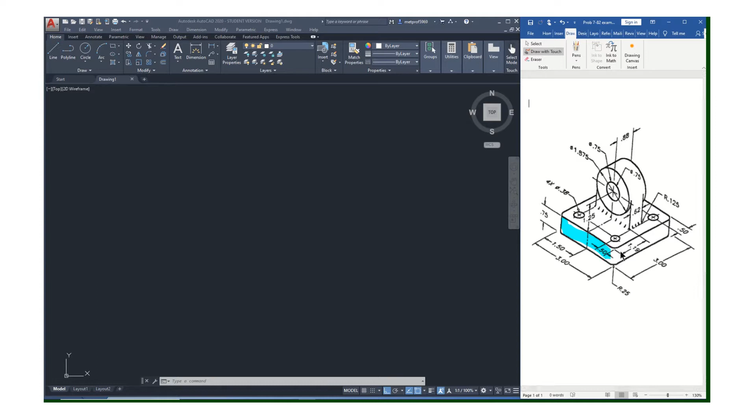Now, it's an interesting part. It does have a lot of geometry to deal with. So let's kind of look at what we're going to see when we do look at the front view. You're going to see this face here. Now, something interesting happened: notice these corners are rounded off. They're filleted. So what you're going to see though from that view is you'll just see a straight edge. You can't tell that it's filleted from this point of view.

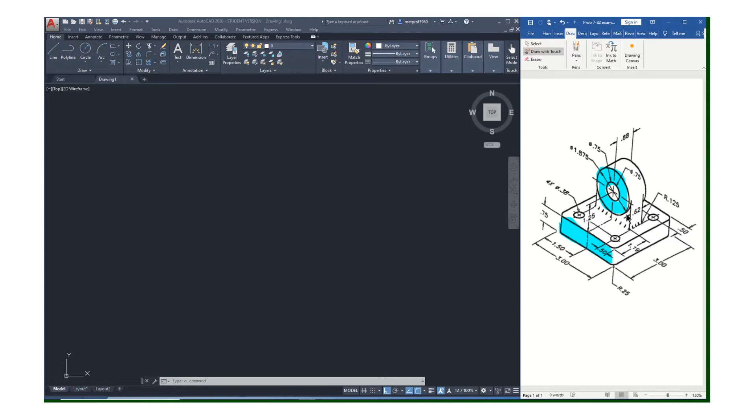That's something you have to kind of get used to. This isn't like a 3D sketch. It's a flat sketch. So when we look at this, we'll see that surface. We're also going to see this round with the hole in it. And we're going to see this part here that connects. Now notice there's a little gap in there, but we won't see that gap from this front view.

And you see those little lines in there? Those lines are trying to show you on this sketch. Now this is not an orthographic. This is kind of a pictorial. They're telling you that that's filleted. So if I'm looking this way, I can see those fillets. So we're not going to have marks like that because we're going to have multiple views.

Now also notice you see the marks there, and that is going to affect the way that we draw this front view because you will see that that's rounded off right there when you look at it. So that's what you'd see in terms of objects. Now we're going to have some hidden lines to deal with because of these holes in the part, but that's a good starting point for us for the front view.

So first of all, let's set up our layers. For my 0 layer, it'll be white, continuous. I am going to use a slightly thicker line. That 0.3 seems to work good. Now remember, that's not going to show up if you don't turn the line weight on. So type in line weight and make sure you do display the line weight.

And we're going to make a center line layer. I've been using blue for that. Oops, okay. It's not going to be a continuous line. I need to load those center lines. Center, say okay, and then make sure you choose it and say okay, and that's good. That's usually why I don't change this until the end, because it'll keep making everything 0.3. So that's the default size, don't forget. If you're going to change that, a good idea is do them all and then come in and change the line weight of just that one.

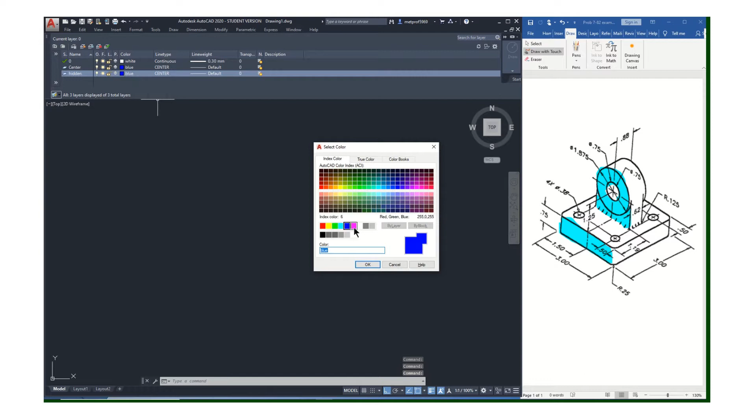And we're going to have hidden lines. And I've been using magenta, I'll just stick with that. And we have to load our hidden lines. Say okay, choose hidden, say okay. So that layer called hidden will be magenta, it'll be a hidden line, and it's a default line weight.

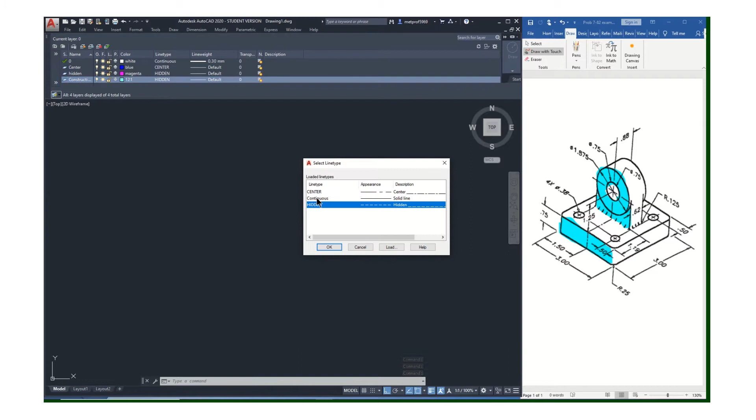And I want to make a construction layer. And I've been using this really light, I think it's 121 is the number, really light blue. Make sure, because again, it'll take the last line type and load it into that. Make sure you put that on continuous, default line weight. And then I always make a dimension layer. And I'll just use red. Continuous line. Okay, I think we're good on our layers.

So again, with that being our front view, let's start with our construction layer. Make sure your ortho is on and your object snap is on. My grid and my snap mode are turned off. Remember, snap mode and object snap are not the same thing. So I'm going to just draw a line here. I'm going to make that like 10 inches long. And same with that one. All right, so this part, if you look at the overall width, is 3 inches wide. So we'll do an offset of 3.

And then what about the height of it? We'll have to do a little bit of math here. What's the overall height of this? This is 0.75. You have a dimension here. Let's see. All right, so I'd get my calculator out, but that's 0.75 high. Here's this dimension: 1.25 will go from that surface up to the center. Now I got to figure out from there to there.

And let's see, if we look, you'll see you have this dimension here. That's the diameter, so that's from edge to edge, which would be the same as bottom to top, and I need half of that. So take that number, divide it by 2, so 1.875 divided by 2, because that's the radius, center to the top, plus 1.25 plus 0.75. So that's easy, because 0.75 plus 1.25 is 2. If you take 1.875 divided by 2, it's 0.9375 plus 2, so it's 2.9375. It's almost 3, but not quite, right?

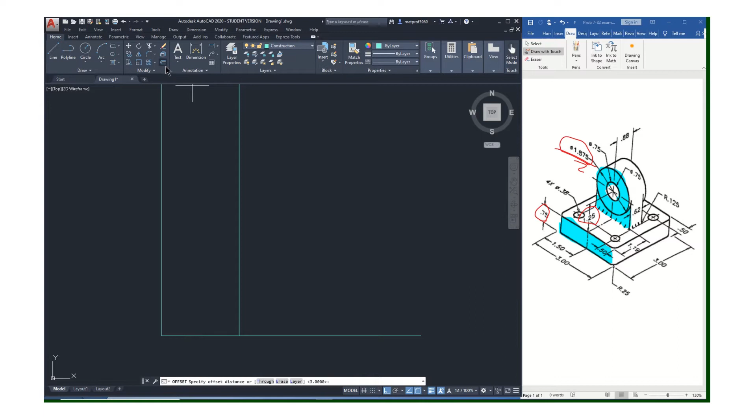So we'll do offset 2.9375, offset up. That'll be the space for our front view. Now, this is kind of a small part, so don't leave too much space between the views. It's going to look kind of ridiculous. So let's just leave 2 inches. Let me do an offset of 2. See how that looks. Yeah, that's okay. I could probably go smaller, but that's all right.

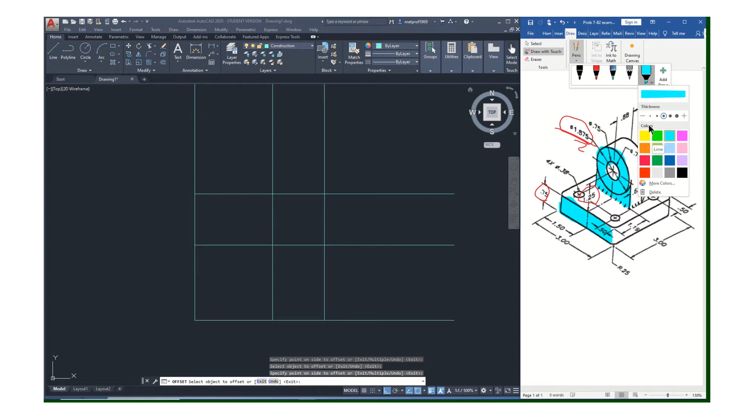And then let's look at the side view. What are we going to see on the side view here? Oh, what do we like? How about this pink color? So when you're looking at the side, you're going to see this part here. Now notice there's a little bit of a step here, which will take care of that. See this? Now this is circular, so you're not going to be able to tell it's round, but you're just going to see all the way up to the top of the part. So from this right side view, I would see what's in the pink right there in terms of object lines. Now again, we're going to have to deal with some hidden lines along the way.

But okay, so back to the width, it's 3 inches. So it's kind of almost a square, quite honestly. You could kind of carve this thing out of a cube. So let's do an offset of 3. Oops, it's in the middle of something else. 3. One more time. Forgot to hit enter. Okay. And then offset of 3. And that'll be a front view, right side view, top view. Let's go ahead and work on this front view. We'll get started with that.

So again, we know we're going to have that little rectangle there. It's 0.75 high, so we can do an offset of 0.75. That'll be that little step there. And now I'm going to have this section that I'm seeing right here. And what is the width of that? Well, what we do know is this diameter here is 1.875. So again, the diameter means anywhere from top to bottom, side to side, edge to edge. From side to side is going to be 1.875. So probably a good idea here is let's just put a center line on this thing.

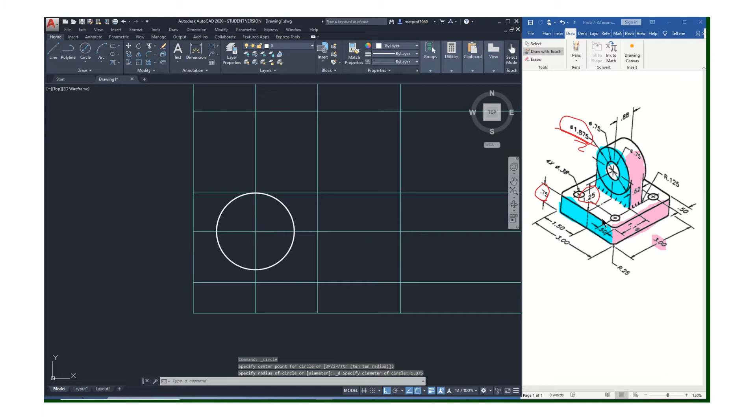So let's switch to our 0 layer. I'm going to draw that circular feature there, center, diameter. Again, it's 1.875. That'll be that. This base is just a matter of connecting the dots, basically. Let's see the width of this. It's the width of here, so we just have to come down from there.

Your object snap is on, so it's going to click onto that now. Again, you've seen this where it does this weird thing. Probably the easiest way is just go past that line, and it'll be vertical, it'll be attached to the circle, and then you just come back in and trim that. Right, just save yourself a little bit of trouble. So basically, again, now you see what's in the blue. Now remember we talked about that these corners are filleted, but you cannot tell from this view.

You're not going to be able to tell about those fillets till I get to the top. Speaking of fillets, look at these little corners. See the callout for a radius of 1/8 of an inch. So on the sides, it kind of flares out. When you make a casting or a plastic injection molding, you typically try to avoid square corners because it's difficult to get them out of the mold. Also, it actually makes a stronger part if you put those fillets.

So we need a fillet with a radius of 0.125. So let's just go to our fillet command. Remember, you have to hit R, enter, type in the radius, 0.125, hit enter, and then click on your 2 lines, and that'll put the fillet. Now you see something happened here, and that is it also wiped out that line. That's a setting which we can come in and change. It's easier just to go ahead and redraw it.

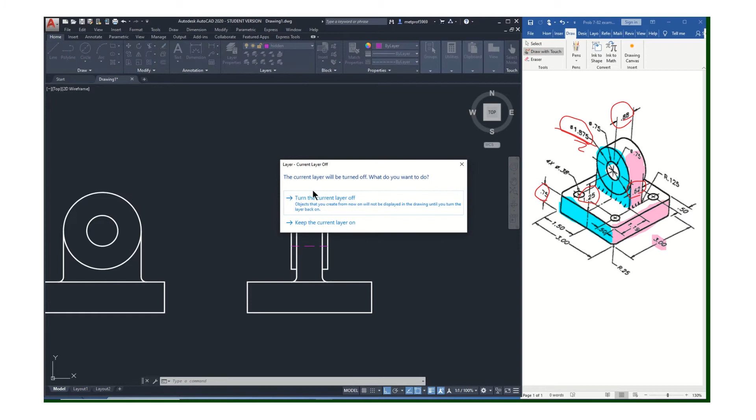Now I do need a center line on there, and that's easy enough to do. Let's turn my construction layer back on. I am going to, believe it or not, turn off some of these lines. It's getting a little crazy here. And I'm going to use these for that top view, so I'm going to leave those on there. So I need a center line that goes along there.

Now remember, the center lines extend beyond the edge of the part, so let's just do an offset. This probably isn't going to need to be very wide. I'm going to do a 0.5 offset. It's maybe a little long, but let's just go with that. Switch to my center line layer and draw my center line. Construction layer off. The blue's a little hard to see, but there's my center line.

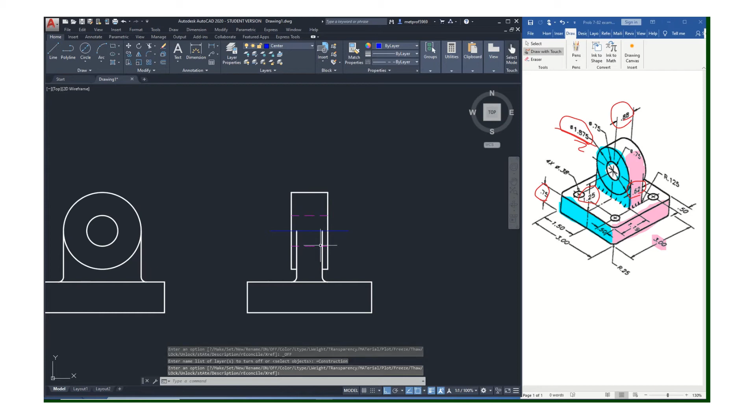Now I still don't have these holes in here. I'll show you why. We'll generate those in a minute. So I'm going to turn this crazy construction layer back on. So front view is done, right side view is done. One thing I didn't do is a miter line. Let's go back.

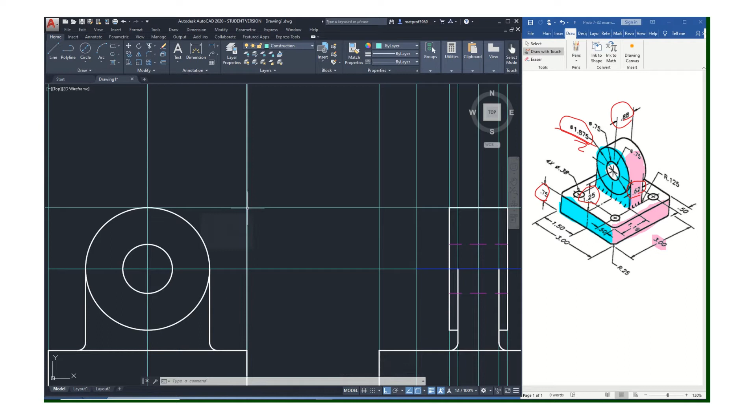So the miter line starts here. If you look at your front view, the imaginary, or maybe it's real, depending on the geometry, upper right-hand corner of the front view, we're going to project a line that's up at a 45-degree angle. Now, because we left even spacing between our views, all I've got to do is click between there, right? So I check that. It better say 45. Yeah, that's my miter. Okay. So top view is going to be here.

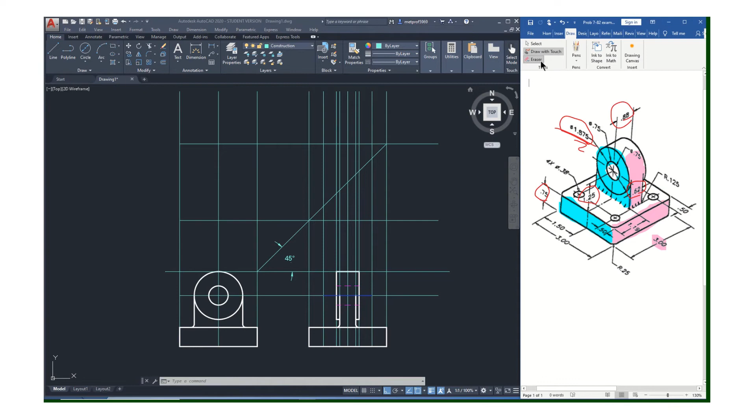Now, what is the top view going to look like? Let's get rid of some of my scribbles. On the top view, I'm going to see this, which is why some people may say this is the front view. I'd be okay with that as long as you were careful with your orientation. I'm going to see that. I'm also going to see the top of this, but I have that same situation where this part is circular, but I'm looking down on this part. So I'm looking down on a cylinder. I can't tell that it's round. You can with your eyeball, but not on an orthographic projection.

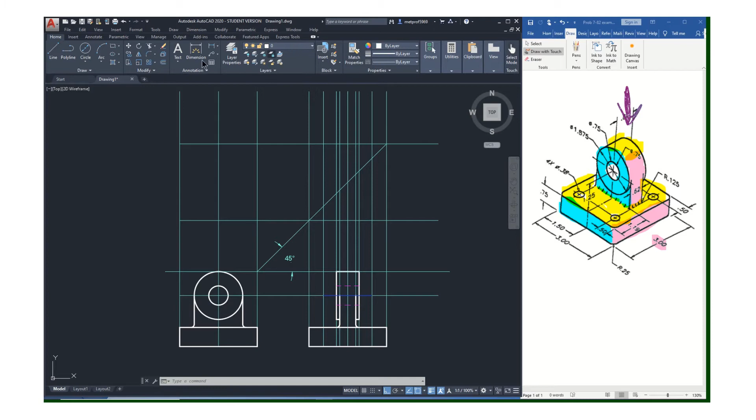So I know the bottom is 3 by 3. Sometimes it's nice to go ahead and put some of these lines on here so that you can keep track of where you are. Okay, I hope I don't forget about this: these corners are all filleted, but I'm going to wait till I have the other stuff done before I get too serious about that. What else do we want to put on there? Let's put this structure that goes on top of here. So let's go back to our construction layer.

Now I know that I'm going to have something to line up to that edge and something to line up to that edge. And now let's use these miter lines. So I've got this line, which is the outside edge. That would be like this face here. There's a line there. So I'm going to project that up and over. So let's see, find that one. It's right there. Again, I'm going to go past the part. Let's go to the other side, and that goes up to there. So let me just draw a line over there.

I try not to do too much stuff at once here. And I'm going to go ahead and darken that in. We'll take a look at that. Okay, so again, looking down on this, now it may be a little hard to understand for now, but when I'm looking down on this cylinder, it just looks like a rectangle. So that's the basic outline. But also notice, okay, I'm going to go ahead, get rid of a few of these lines that I don't need. It's getting very, very cluttered. I don't even remember what that line there was. That's right, we'll come back to that.

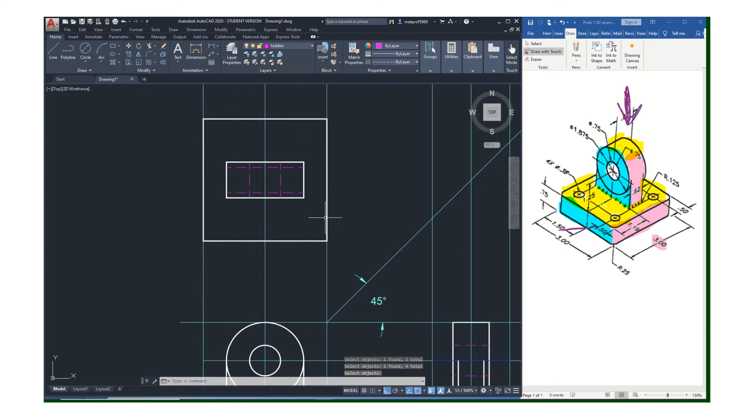And I do need these 4 holes on the perimeter. Let's go ahead and do that. Now those are offset by a 1/2 inch. Everything is a 1/2 inch over. So let's just set our offset for 0.5. Now I conveniently erased that construction line. I'll just use that object line. It's just going to be a construction line. And those are 4 of them. They're 3/8, 0.375. And I'm on my hidden layer.

Now what happens if you do that? It's easy enough. Just click on it, then go up here, switch it to the 0 layer. It goes to 0 because I can see those holes. And so I forgot to do that. Okay, so let's go back to there. 0.375. And then I'm just going to erase that. Those are just some construction lines. All right, looking pretty good.

Let's put those fillets on there, and around those, what are they? They're 1/4 inch, so those are 1/4 inch radius. So fillet R, enter, 0.25, enter, and then just click on these. Spacebar, you can keep going. Spacebar. Okay, so that is the top view, minus a few center marks.

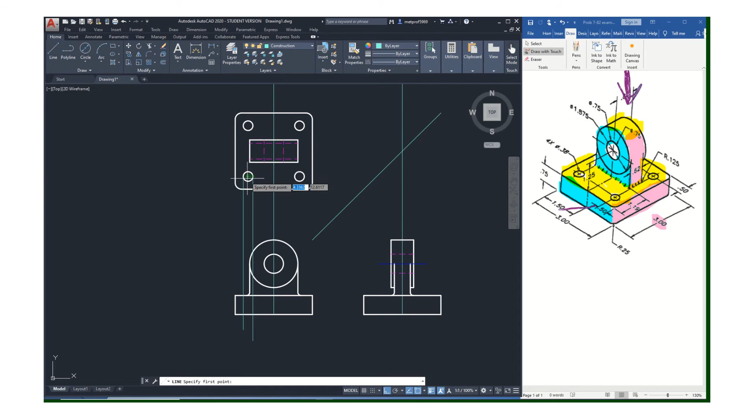Okay, let's draw some construction lines that go from, now these line up, so it's going to be one set of lines, left side of the hole, right side of the hole, and then also we have a center line that we're going to need. Okay, and then on this one, I'm just going to put a center line down.

And then over here, I'm going to project that center over and then down, center line over and down. I'm just going to draw one of these holes and then I'm going to copy it to the others and make it easy on myself. So I know that the sides, because I cannot see inside the part, we're going to help you notice that there's something happening there. Again, when I look at that part, those features are just hidden. So those are hidden lines. And then I need a center line.

So before I do that, I'm going to do an offset. Something less than, let me try 0.375. Yeah, that's good, that's good. I'm going to turn my construction layer on. You don't need crazy long center lines, but they do need to project. Oops, that is not what I wanted to erase. So in this case, what I want to do is erase that little segment. When you do erase, just draw a window around that and it'll just erase that line.

So I do want the center lines to project above and beyond the parts so that I can see them, but I don't need them to be so long that it just looks crazy. So I did 0.375. So it's kind of up to you to put something on there that makes sense. All right, it takes a long time when I'm talking about this, but it doesn't take that long to actually do the work. Okay, I'm erasing these. Don't want to erase that center line there.

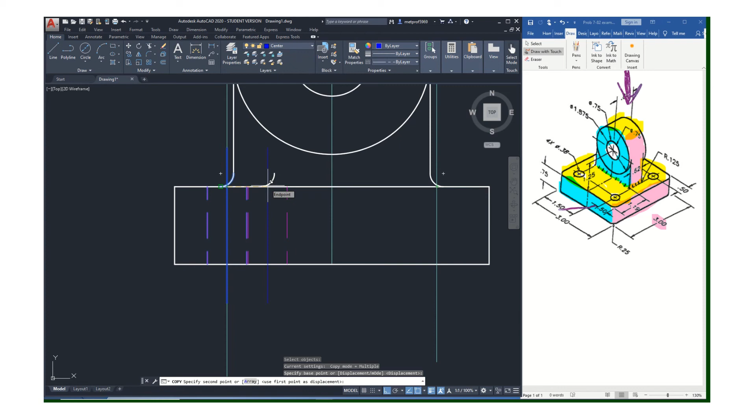Uh-oh. I got the little chunk of that thing right there, right? So I can go back and re-window. Let's just do this, and I'll just delete that. That's kind of funny. And then I want one over here, and one over there. And object snap makes that easy. So yeah, I can just erase that. So what you could do when you choose the window, you can come back and unselect that, if that makes sense. And let me turn off these, and we'll take another look and see if we got everything.

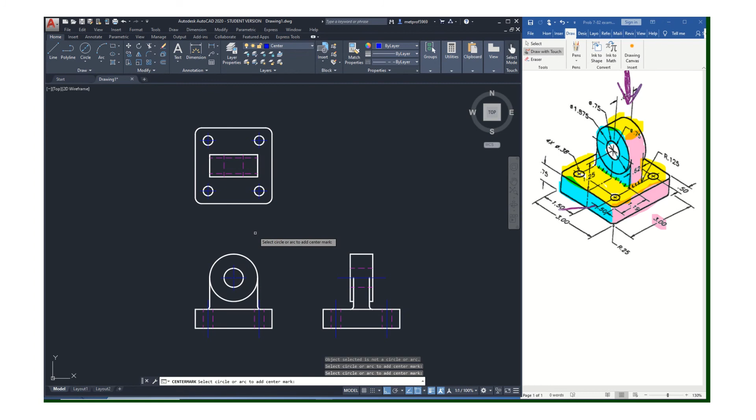I think other than center marks, go up to annotate, center marks. Oops, I don't know what layer I'm on. I think I'm on construction. Oh, no, I'm on center. Okay, that's cool. Go to annotate, center mark, and then just go around and click. And the blue is not great on the black background, but it'll be just fine when you get it on your paper. And back to the home tab. And there is our orthographic. So from that kind of pictorial, we've generated accurate orthographic drawings.

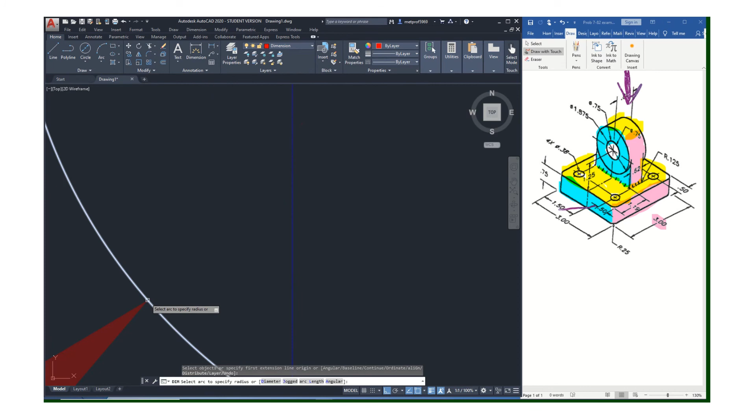Now you will need dimensions. Remember, use good dimensioning practices on these fillets. When you dimension those fillets, make sure you do. Now, if you go to get a fillet and it won't cooperate, zoom in on the thing, at some point in time you'll see it'll realize it's a fillet, and then that'll pop up, and then you can put it on. And we've talked about this, the appearance of this little circle-y thing. It's totally fine. Now I got too many decimals on there, obviously. And so forth. So there you go, you would dimension it.

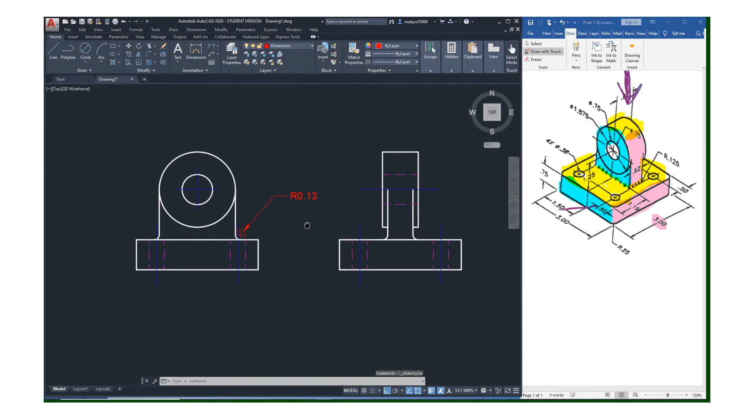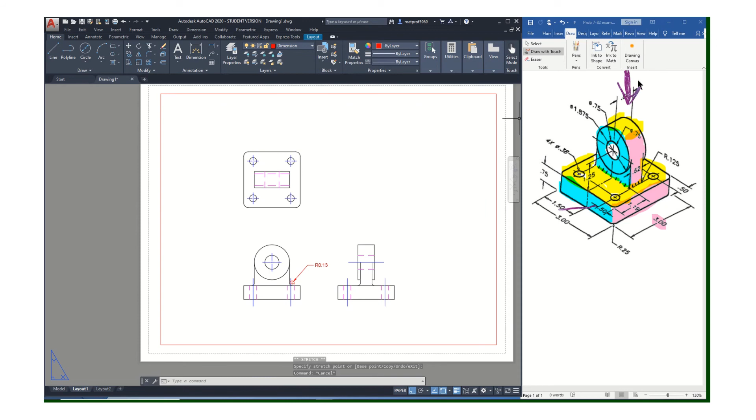Now one other thing I want to show you is, let's put this on a piece of paper. Let's go to our layout. Give ourselves a little real estate to work with here. And I think we're done with this. I can get rid of that, make this bigger. So check out my lines. Oh, I did forget. I forgot that center line. That's okay. Easy enough. Go back to the top view.

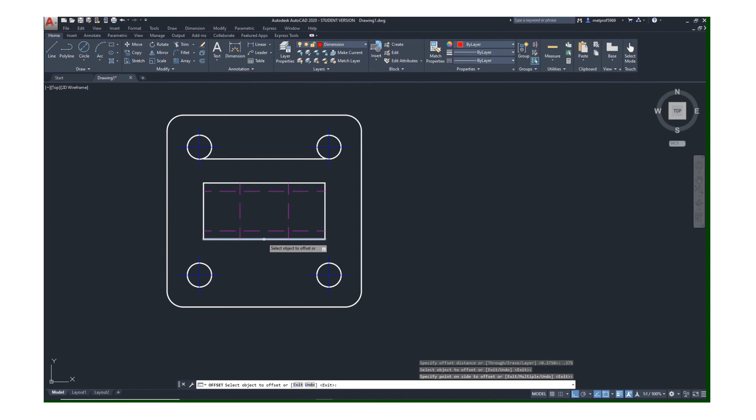I need a center line. Do some offsets here. Switch to my center line layer. And since I already got rid of my construction lines, I'll just go down there and attach to that a little bit. Let's trim. So that's going to be a cutting edge. That's going to be a cutting edge. Enter.

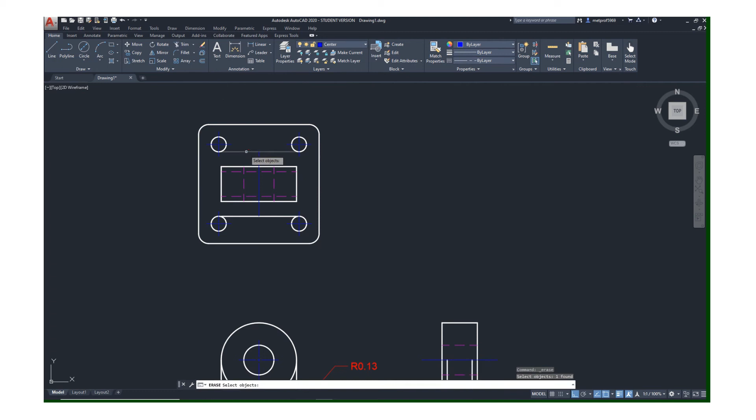Trim that off. And then just erase those. So it would have been easier if I did it before I got rid of my construction lines. Okay, let's go back to the paper. So check this out. You can't tell that that's a center line. You can't tell that any of these are center lines. So we need to fix that.

So that is something called the line type scale. Now don't change it in the model space. That isn't important. You're going to be wasting your time if you change them in the model space. That's one of the reasons it's nice to see the colors. I know that blues are center lines and magenta is hidden and so forth. Just wait till you get it on the layout, and then we can change that.

So what you have to do is click. Oops. You have to click on that line. First, double click inside the page, right? So I was out here working on the border. So come in here, double click. So click, right click, and go down to where it says properties. And this is going to pop up. If you can't read it, you can open this thing up.

So that is called the line type scale. The default value is 1, and it really is just a value that the guys in the software wrote that they don't know about how long the line segments and the gaps should be because the scale of each drawing is going to be different. So typically you have to change that. So if you come up here, you'll see where it says line type scale and it's 1. The problem is the gaps and the line segments are just touching each other, so you can't see the gaps.

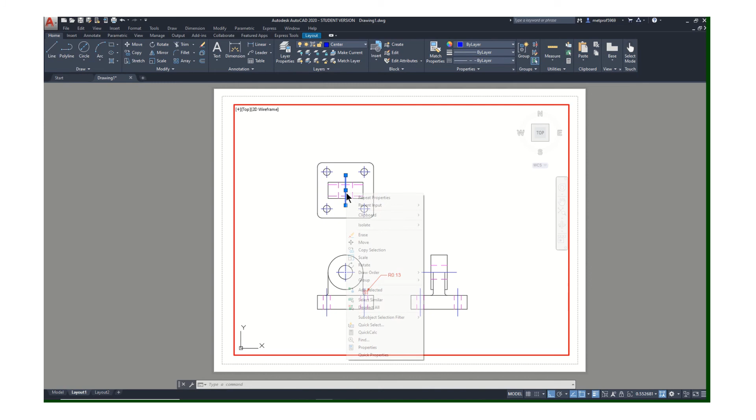What you have to do is make this number smaller. Don't make it bigger. Bigger does not work. It has to be smaller. And don't make it something crazy small. Try 0.5. That's my go-to. Let's see what it looks like. Didn't do it. Let's do it again. Click, right click, properties, and let's try 0.25. See what happens. There we go.

Now we're getting there. So 90% of the time, 0.5 or 0.25 will work. Do not put 0.1, 0.01 or something stupid like that because it doesn't work. So that'll adjust that. So now that I know that, and that was 0.25, I can do these others. So I just can click all of them. I'm just going to keep clicking them. Then right click properties. Line type scale is 0.25. Hit enter. And let's see what we've got.

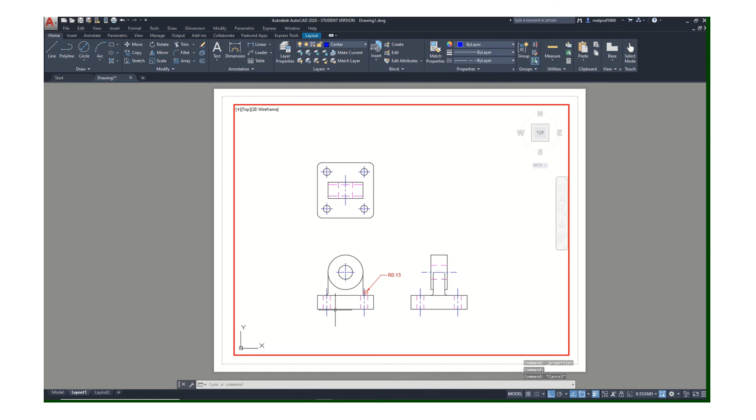That looks pretty good. Now, if you have different lengths of center lines, for example, see how this one has kind of an odd look? It's okay. It's fine because it has the long segment, short break, short segment, short break, long segment, still the same. So the longer these are, the more they'll change, right? And I can see what I mean now. Let's just undo. That's a better way to do that. Okay. So if you make these really short, you're gonna have a really difficult time. No, don't worry, that'll update. You're gonna have a really difficult time making these look like center lines.

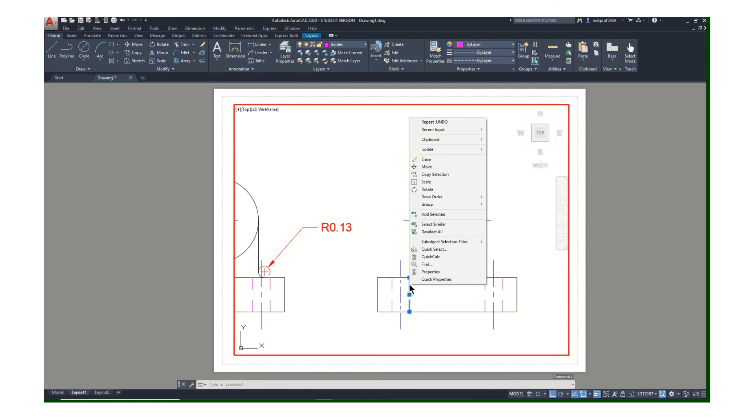Now, same thing can happen with your hidden lines. If maybe they look funny, especially if you have a really thin piece, like these are okay, it's readable. But if you wanted to change that, you would right click properties. Now, since we know that 0.25 worked for the center line, let's try that for this and see what it looks like. It doesn't have to be the same. See, that's too much, too many gaps and whatever.

So let's go back to properties. Let's do 0.5. This is a little bit of a pain, but typically you'll be working in the same kind of scale drawings. That looks a lot better. So now I could click on all these. I could even do like 0.75. Don't make yourself crazy on them. Just make sure they look like hidden lines.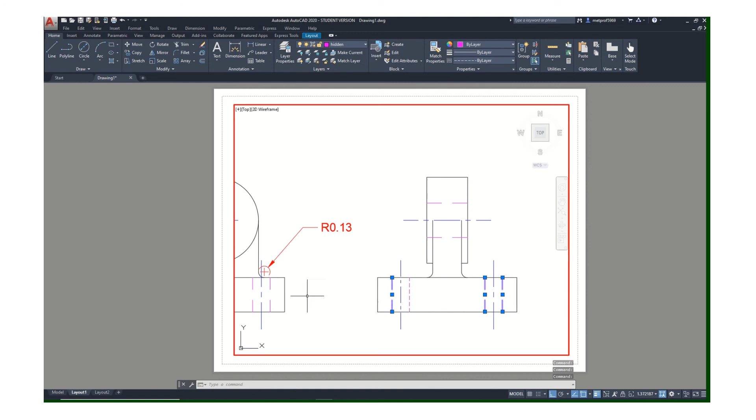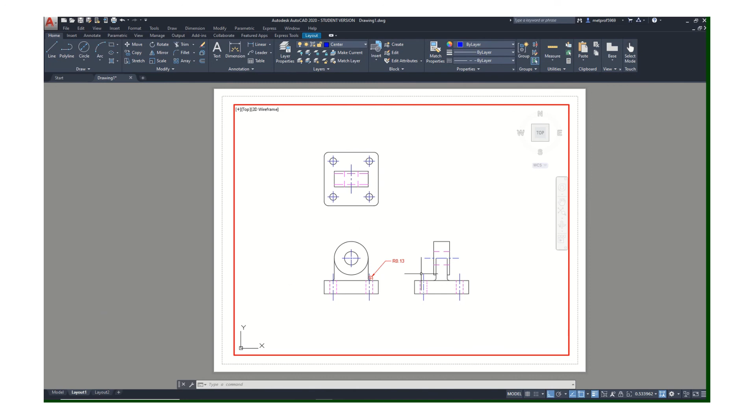These are actually acceptable, but since I already started that, right click properties, 0.5, and they'll all look the same. Try to make them look as much the same as you can. So there you go. Now again, this doesn't have dimensions, it doesn't have the title block and so forth, but now you can see what the drawing looks like. Okay.